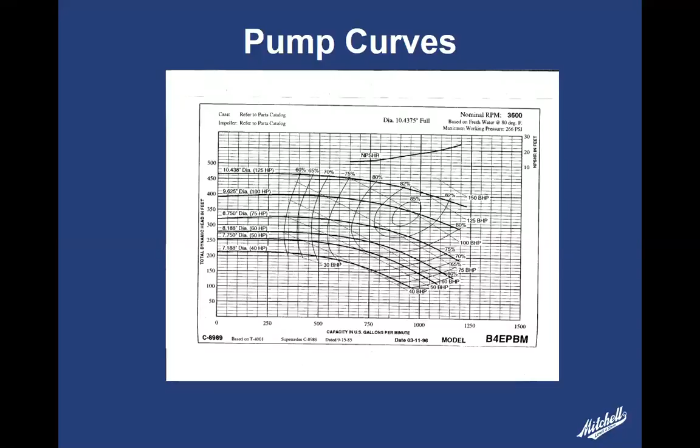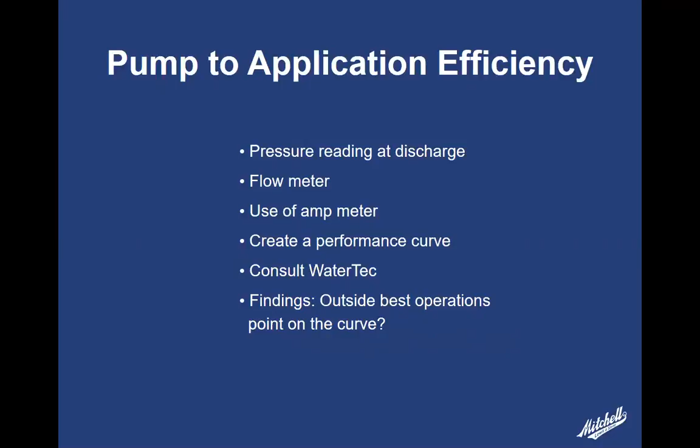All right. Okay, this is more or less what I was just talking about, checking your pump. I already went through all these points pretty much. And again, if you're operating all the time to one side of the best efficiency point or the other, you might want to look at changing a pump, or you could put a variable speed drive on and maybe bring it back into a better efficiency that way.

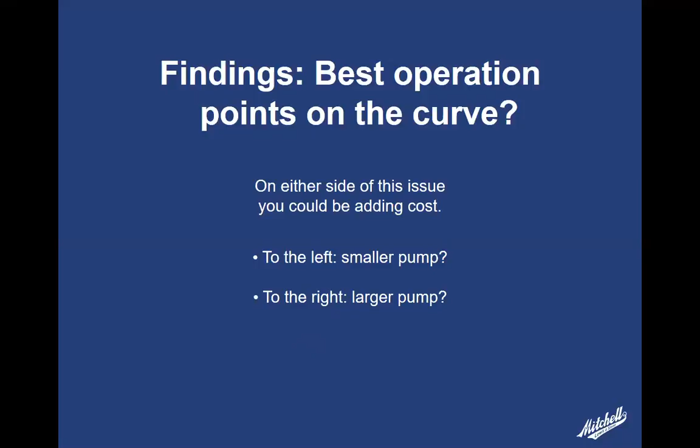And so here we are, we're talking about VFDs now, and is a VFD a solution to help get the efficiency you need out of your pump? And sometimes it is. Sometimes you might have a pump that's running higher pressure than you really need, and by putting a drive on, it's going to move it back down, maybe not use so much electricity. Instead of 60 pounds, you only need 50, and you can turn down the RPM, and it will operate at a better design point.

And so what I'm basically saying here is there's pros and cons of putting a VFD on. A VFD can reduce your power consumption. And the main thing there too, like we talked about, when you throw the switch and start your pump, if it goes all the way over, the drive has the ability to set an amperage range, and it won't let the pump go into that mode.

We actually have a pipe fill mode on the drives that will allow time for the whole pipeline to fill up, and then the drive will ramp up to its operating speed. But it will never exceed the nameplate amperage of your motor.

Excuse me, Mike? Yeah. You might want to just mention what a variable frequency drive, VFD, is and how it works. Sure. I thought that was someone else's topic. No, actually, a VFD, if you don't know, basically does what it says. It's changing the frequency of the motor, because our systems operate on 60 hertz, and what the drive does is change that 60 hertz. When you reduce the RPM, it's changing it to 55 hertz, 50 hertz, all the way down. So that's what it's actually doing. It's changing the hertz, and that changes the speed of the motor.

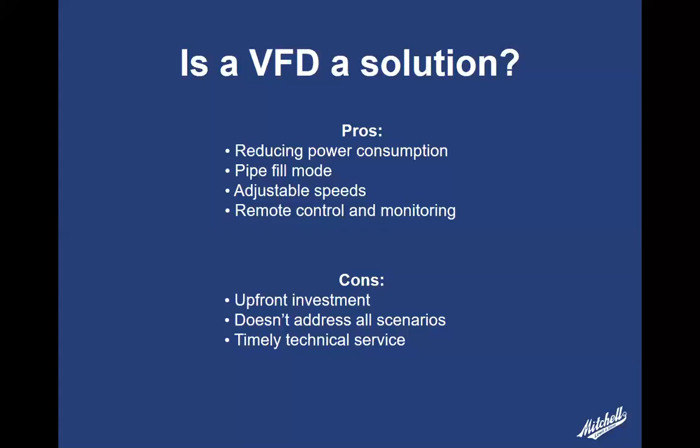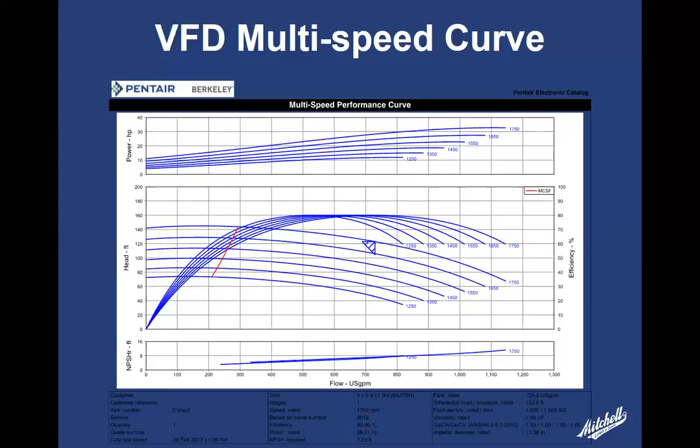Okay. So I want to talk about factors in pump efficiency loss. It's going to happen. One is if you have an old pump out there, it could be, who knows, 30, 40 years old. I've seen a lot of pumps out here that are pretty old. It's amazing how durable some of these pumps are, but the efficiency of a lot of those pumps is probably pretty low just due to wear.

But anyway, a big factor of loss of efficiency in a pump is abrasives. If you pump dirty water, that water going through the impeller removes material, and then your wear ring clearances open up, and you're going to see a pressure loss.

And then the other thing that happens is as your pump wears due to abrasives, the curve will tend to actually move to the right. It'll actually want to pump more volume, but it's going to do less pressure. But it's recirculating water within the pump itself too.

And then also, you can start to develop vibration. I've seen where you get a rock in the vane or something happens, something gets out of balance or just starts to get too worn, and you get vibration.

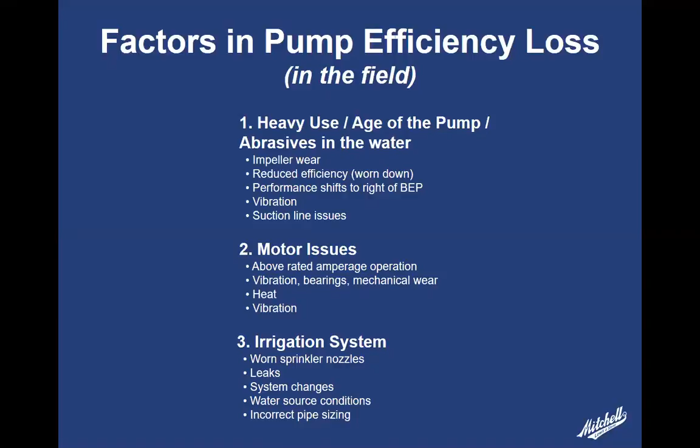And this is a topic that comes up a lot. People talk about the old motors. You had the old cast iron frames. You look at an old 5 horsepower motor and it was like this big, and the new ones were real tiny. But the old motors, they had a lot of cast iron. They had big windings, large openings for good cooling. And that's why a lot of those motors, when they ran, they didn't feel that hot.

But in reality, they probably weren't as efficient as the new ones. With the new motors, they've condensed the size down. So most of that heat now is going to the shell of the motor. So it's not that it's running really hotter, it's just that you're seeing more heat going to the shell of the motor. But now with these new efficient motors, as explained before, they've got the new high grade copper wire. They've got better insulation, so they can really handle that heat a little better.

And the thing about a lot of the new motors now, especially like I'd say 30 horsepower and below, most of them have steel or aluminum frames. And that's why you feel a lot of heat on those too, in those steel frames. And as I explained before, the standards, that was supposed to be 2017, but that was the new efficiency standards that they had to go to, and then just the improved wiring.

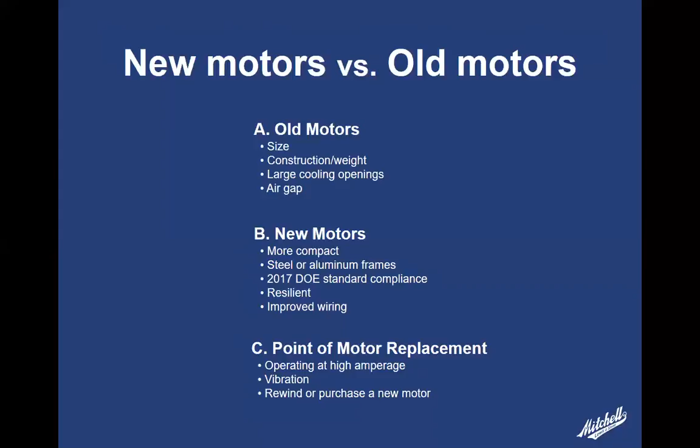Here I want to talk about rebuilding versus replacing a pump. We sell Berkeley, and we even sell Cornell, that's why I use them as examples here. A pump is basically pretty simple. There's just an impeller, wear ring, packing, or maybe a mechanical seal in it. There aren't a lot of parts, but they do charge a lot for some of those parts too, especially if you have a large pump.

So if you needed parts like an impeller, it's probably fine. Go ahead and replace the impeller. But if you need something more like a volute case or a bracket and an impeller, then I'd suggest we get the pump end kit. And if it was a Cornell pump, you probably have to just buy what you need, because they don't really offer a kit program for theirs.

The other thing you have to look at is the age of your pump. Even with Berkeley, we have these old A-line pumps. There's quite a few of them out there still, but if anything goes wrong with them, there's no more parts available. They're obsolete. So if your pump is really old and you find out there's no parts available, you're probably better off just getting a new one.

Because if the pump fails down the road, you can't get parts. And maybe the model you need may take a few days to get, and you've got crop out there, and you know how it is. You need it right away. Just like those dairies with all the cows, they need water right away.

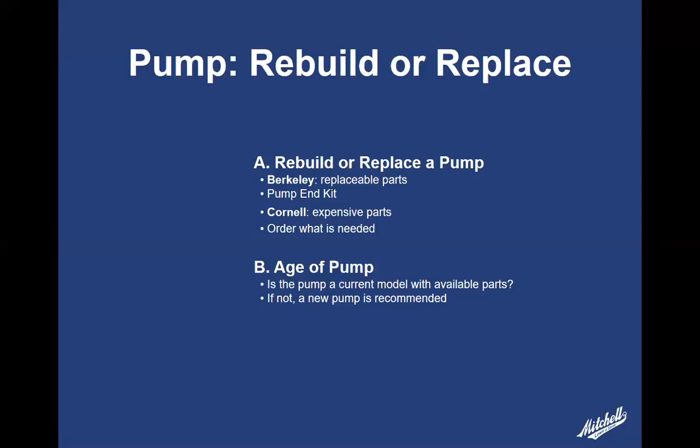So, any questions on that? All right, well, that's pretty much what I had to cover here.

A lot of times we get asked, people want to oversize their pump. Bigger motor, not necessarily better efficiency, but there's some comfort in knowing that if the pump starts to fail, you have a little bit of cushion. Yeah, you're right, because you do want to allow for wear over time. If you try to size that pump right to the exact point on the curve, as the pump wears, it's just going to go down.